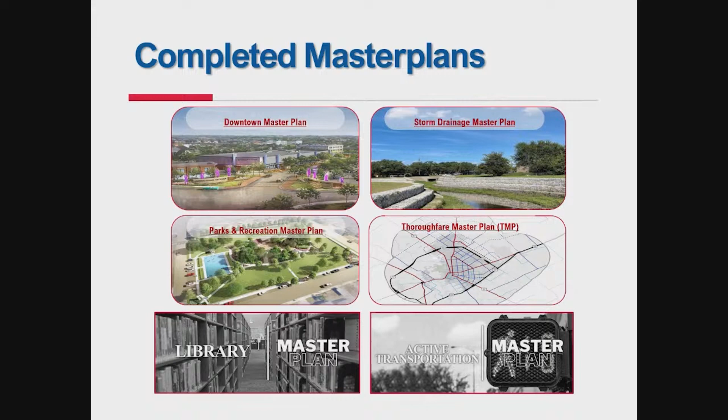So there are some things on there that have come from these completed master plans as they've taken a deeper look into specific issues or aspects of our community. With that, I'd like to go through what we are proposing to be in this next action agenda. These are not weighted as any one priority over another - they're all equally important, and they're all items that different departments, our stakeholders in our community, be working on, primarily city staff. They're broken up into those focus areas of the comp plan.

So the first out of land use and development would be to adopt our new and updated floodplain maps. The I&I drainage study implementation and drainage fee, and then infill and redevelopment analysis, really related to infrastructure projects and what infrastructure is needed to facilitate infill in certain areas of our town.

Under the mobility section, we have transit route study, increased downtown parking access and improvements, specifically being mindful of ADA accessibility, pedestrian and motorist safety, and more of a public information campaign with our police department and public information departments.

Then Guy Grant reconstruction, North Street reconstruction, and how do you phase those out, and the projects in their totality, because of course they're many years long type projects. And then complete streetscape package and mobility package - these are a specific action item out of the downtown master plan. I can get you more information on what those are in that plan, but it's related to that master plan.

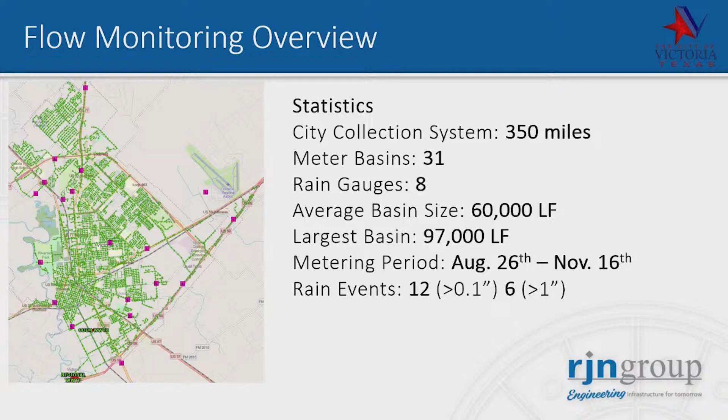That's a really good number, that's really where you want it to be. Anything larger than that doesn't give you a lot of information on the sewer shed, but anything smaller can just get really expensive. So this is like a really good spot to be.

The first step to doing the hydraulic modeling is building that model, and this is a very time-intensive process. We had the city provide us a lot of GIS and as-built records. We went out and did about 500 manhole surveys so we could get elevational data, and we feed that all into the model. We build a full system model, meaning every manhole, pipe, lift station, and force main is represented in the system. So it's a lot of data to feed into one digital network.

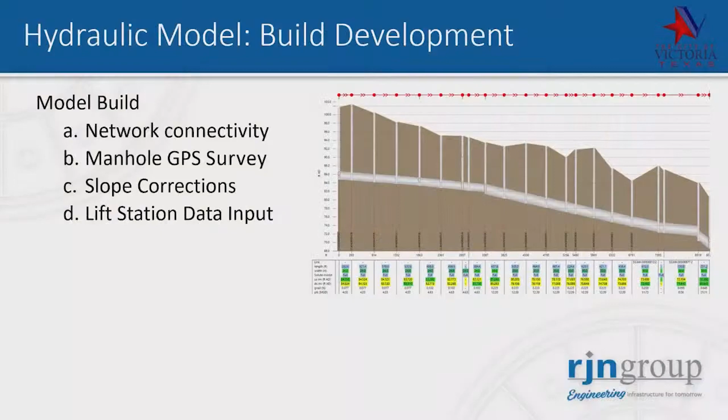That picture you see is essentially a profile — if you were able to look under the ground, that's how that pipe network would look under the surface. What we want to make sure is that everything is flowing downstream towards the wastewater treatment plants, and that the lift stations are represented accurately with pump curves and with the correct wet well diameters and force main diameters.

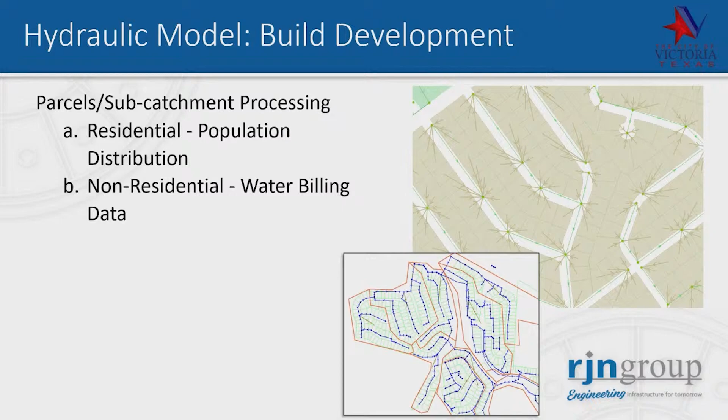Once the network is built, the way we load flows into it is by loading subcatchments into the network. Subcatchments are essentially what feeds those flows into the hydraulic model. The way we do this is we grab your city parcels and load those into the model as subcatchments, and if they're residential, they're loaded with a population, which is then multiplied by a per capita flow rate, and that's how you get some dry weather flow in there.

For the non-residential ones, we use your water billing data, about 90% of it, and we put that as a static number on the model to represent non-residential flows — anything commercial, industrial, restaurants, stuff like that.

So that each time on, does this have a pointer?

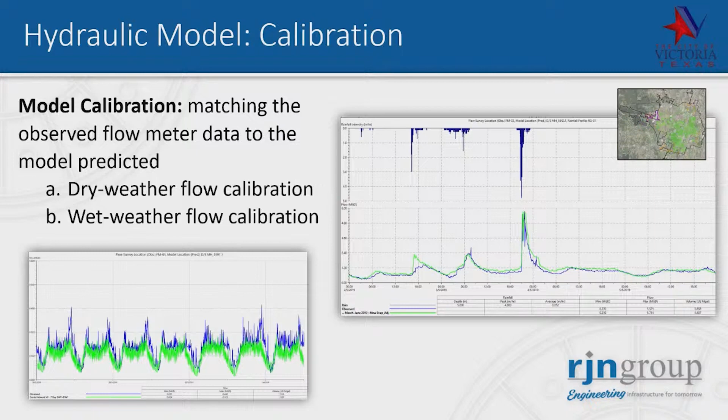Ooh, kind of. So these blue lines up here represent rainfall, and every time that it rains, your sewer system and every sewer system across the world, since they're not sealed tight, they experience some inflow from that rainfall. And so you can see the flow spike every time it rains. So we're trying to simulate that with the Wallingford hydrology method.

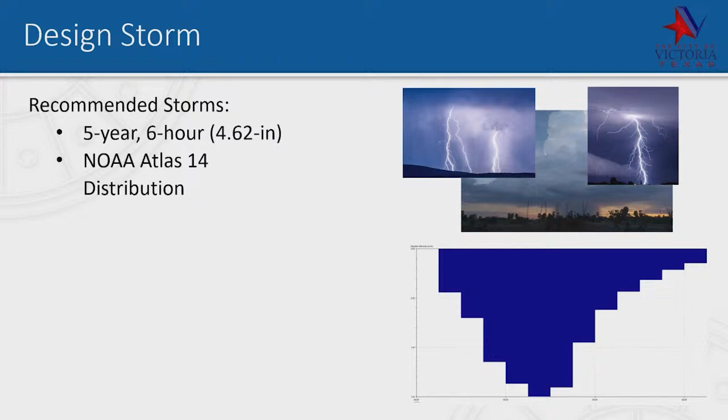So we finish a calibration for dry and wet weather flow, and then we want to stress your system to figure out where your bottlenecks are. So in the region, we normally use a 5-year, 6-hour design storm, which is what we have applied to the hydraulic model, to then stress the system and then see where the bottlenecks are.

Of medium importance is something that starts a surcharge. So surcharging is when the water level surpasses the crown of the pipe. So medium importance is something that's surcharging, so it's being somewhat restricted, but it's not reaching close to the surface of the ground, meaning that it's not close to being an overflow.

Then high importance is somewhere where it's surcharging and it's within 4 feet of the ground. So it's really close to overflowing through some manhole or to someone's house, stuff like that. And obviously the ones that we tackle first are any predicted overflows that the model gives us. So when that water surface reaches the top, that would be a sanitary sewer overflow.

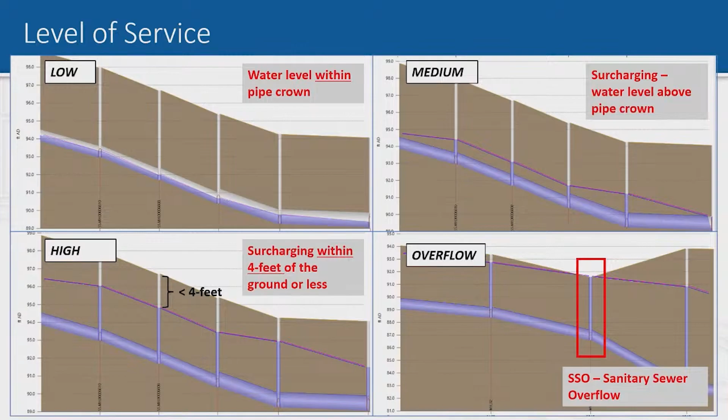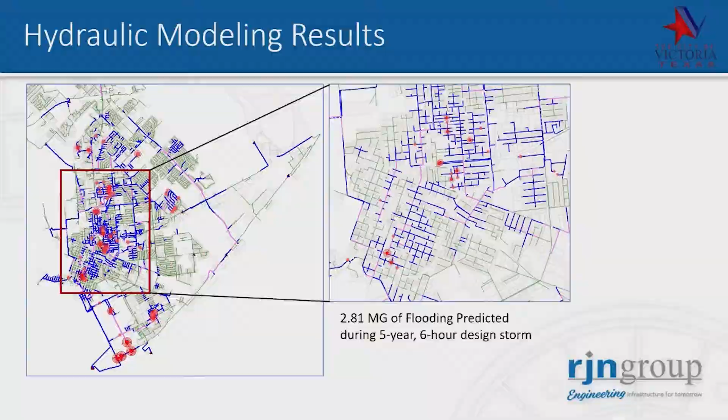So on the right picture, it's a zoom in into that area, and you can see that there's a lot of SSOs, but overall, I know the picture looks overwhelming with how many red dots you see, but in total, it's 2.8 million gallons of overflow during this very intense design storm. I've worked all across the state. For a city your size, you're doing pretty well. And so from this, we find out the bottlenecks and we start developing the capital improvement plans that we need to tackle.

So we applied a standard. The city's priority is to renew your existing assets to be able to fix the existing defects and therefore reduce the amount of I&I that's coming into the system. Based on the flow monitoring data and the model, we figured out the 6 basins that were kind of the leakiest, so where water is coming in the most, and we assumed that we're going to be able to achieve a 25% I&I reduction rate. So we're automatically reducing the flows from the model.

So we identified the 6 basins to target a 25% I&I reduction, and those are priority number 1. And then priority number 2, 3, and 4, which Jose is going to go through, are identified as a 20% I&I reduction. So that's applied to the model. And then based on the final results from that, we developed capital improvement projects for any SSOs that weren't fixed just with this I&I removal.

Can you speak into the mic? Sorry to jump in there.

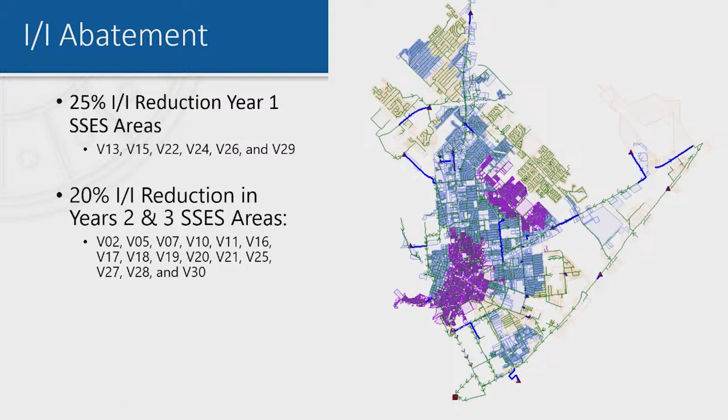Just if you go back a slide, one key thing we wanted to point out: she mentioned the system's doing really well. And when she mentions the 2.8 million gallons of overflows that we're experiencing, that's with the assumption that we do this I&I reduction. So I just want to hit that hard, that it assumes that needs to be done. If you ran it without those projects happening, that number would be considerably higher. So I just wanted to point that out. Thanks, Jose, for clarifying.

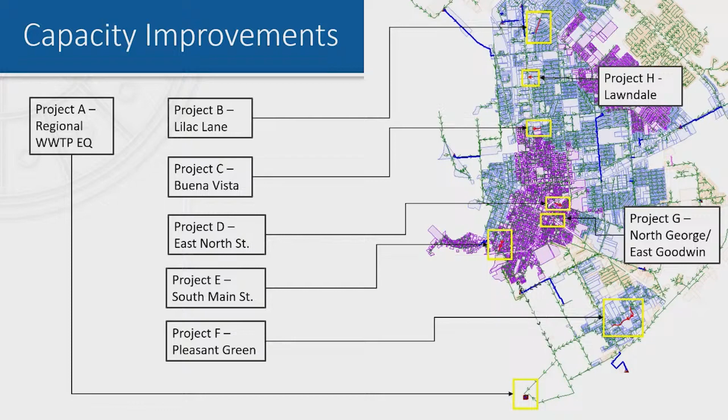So this is a list of capital improvement projects within the wastewater collection system that we've identified. And we'll jump through these. This is essentially the location; if we have to come back to see where they are, we can come back to the slide. So project A is at the very downstream. It's at the wastewater treatment plant. Right now there is a holding basin that's 11.3

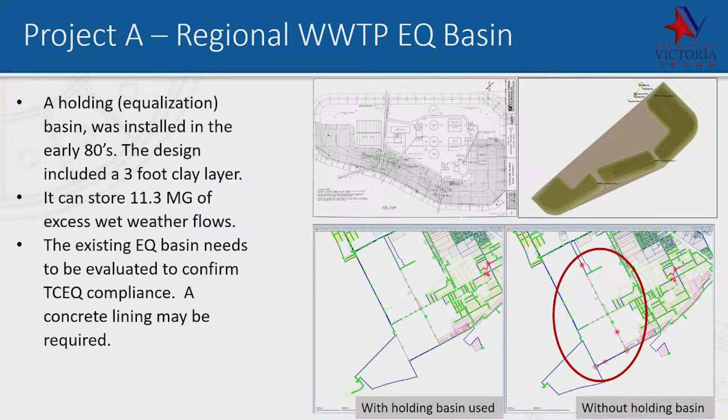And so the first project is to do additional studies at the EQ basin, because right now it's not permitted. But the idea is to do some additional testing in the EQ basin and figure out if there's an impervious surface still in there. So worst case scenario, if that impervious surface doesn't exist, we'd have to put some concrete lining so that we can use it and get the EQ basin permitted.

But the good news is that the basin is the right size. When it was built back in the 80s, it was very well thought out, so that basin fills in and out by gravity, meaning it doesn't have to be pumped in or out. So it's just a matter of doing some further studies and then getting it permitted, hopefully. But the 11.3 million gallons is certainly big enough to contain the flows from the 5-year, 6-hour storm.

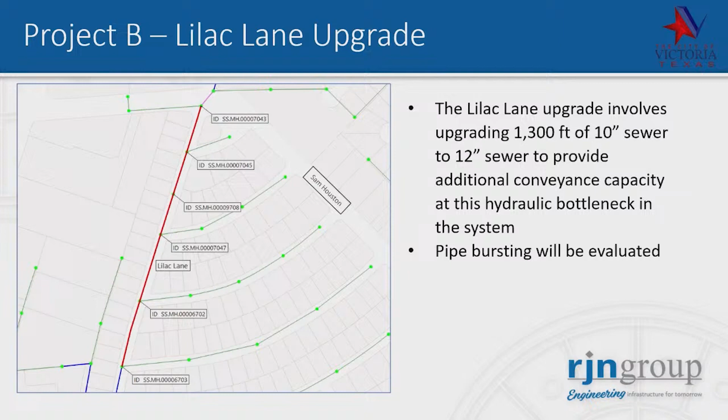Project B, the next set of projects are all upsizing pipes, so I'll fly through them, but if you want to stop me, feel free. So Project B is on Lilac Lane. It's just upsizing a 10-inch to a 12-inch sewer, and since that upsizing isn't that great, we're going to also evaluate if we could just do pipe bursting. That way we don't have to renew the assets completely. Project C is on Buena Vista Avenue. It's about 850 feet of upsizing sewer from an 8-inch to a 12-inch pipe.

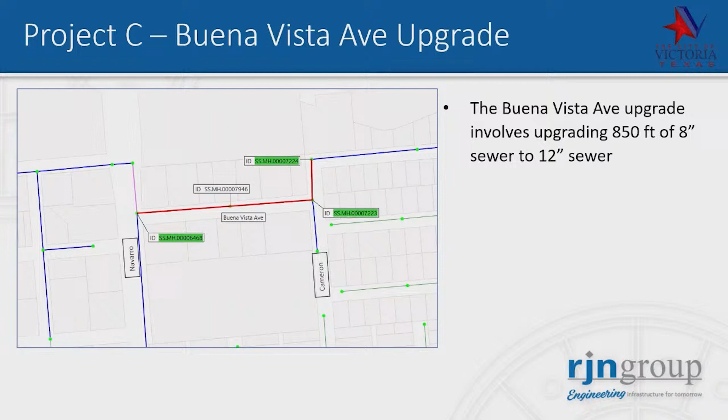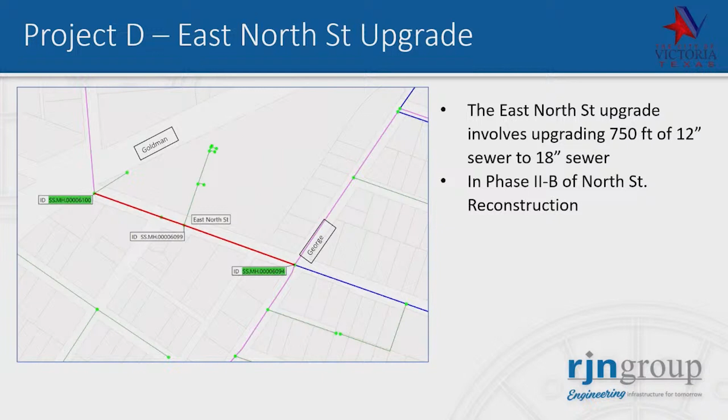On East North Street, there is an existing 12-inch that's pretty restricted, and it's a matter of upsizing this from a 12 to an 18. There is currently another project going on there, Phase 2B of North Street reconstruction. So the plan is to integrate the sewer upsizing as part of that existing project.

Project E is along South Main Street. It's a pretty large bottleneck; this is in the very center of the city, one of the older parts of town. And there's a lot of flow coming through this 12-inch, so it's pretty restricted. So the idea is to upsize the 12 to an 18-inch and reduce a lot of the surcharging that's occurring upstream. This one would target a lot of those SSOs that you saw in the very center of town.

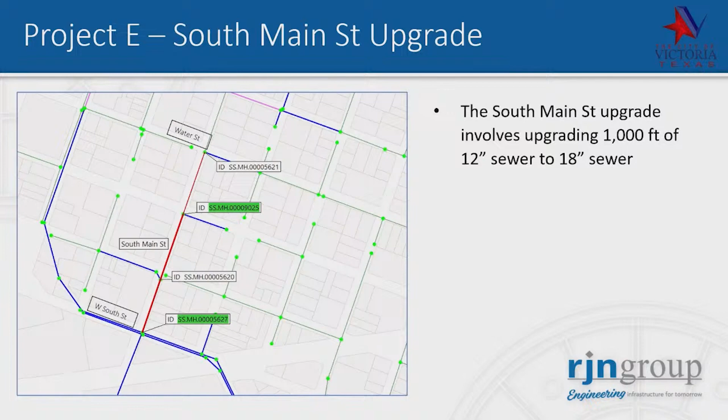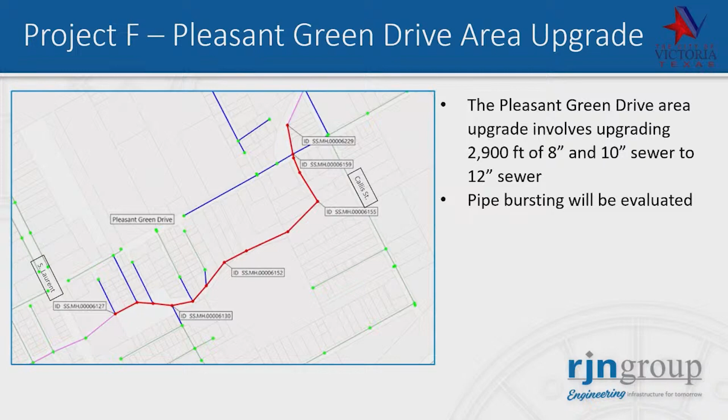Project F is on Pleasant Green Drive, and that's about 2,900 feet of upsizing an existing 8 and 10-inch sewer to a 12-inch sewer. I think most of it is an 8, so it's mostly upsizing that to a 12. Again, pipe bursting will be evaluated here, so if we can do pipe bursting, we will. That'll save some money. That way the assets don't have to be completely renewed.

Project G, this one requires a little bit of verification. We did some manhole surveys in this area, and the manhole surveys said that this pipe was a 15-inch, which causes a big bottleneck in that area because the rest of the sewers are 21. But we think that we just need to do additional verification to see if it's actually 15. If it is, it has to be upsized to a 21, but if we go out there and find out that it's actually a 21, it was just recorded incorrectly on the survey, then this project would then go away.

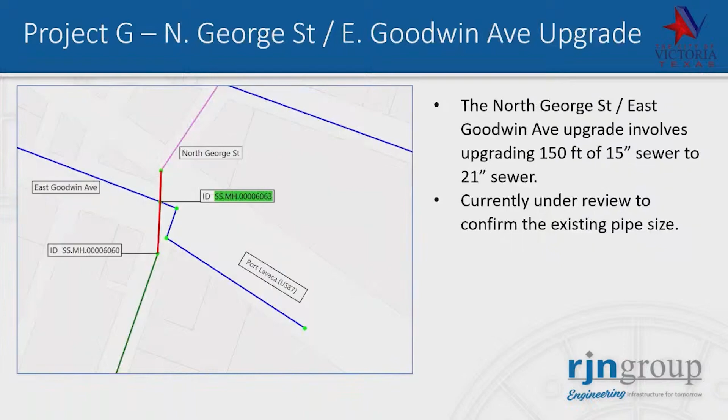Project H. So can you go back to that one? Yeah. So assuming that it shows that that's actually a 21, like the rest of it, then is there another issue? No. Or is this being recommended solely based off of the flow monitor or the model? The model. The model counts it for being 15? Yeah, the model has it as being 15 because the survey data that we did in the field said that it was a 15.

Got it. But the GIS says that it's a 21. So right now, there's two differing sources of information, and we found that out a couple days ago. So it's just a matter of going out there probably next week and seeing if it's actually a 15 or a 21. If it is a 15, it has to be upsized to a 21. But if it's a 21, then this project would be scratched from the list completely. Got it.

Did that? Yeah, thank you.

All right. Project H on Lawndale Avenue. This is actually extending a sewer pipe, so we don't normally like to do this, but sometimes it's very efficient to try to divert the flows to an existing pipe that has capacity. So right now, the Lawndale Avenue pipe flows to the right, and the one on North Navarro Street goes south. The one on Lawndale Avenue surcharges, and there's a predicted overflow right there because the sewer downstream of that is backing up.

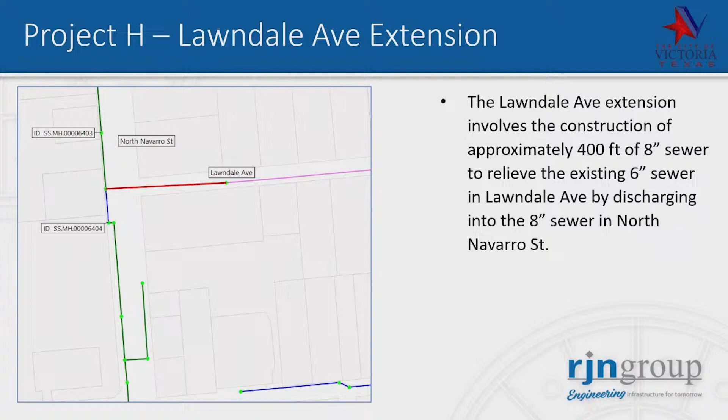But if you just add a little 8-inch connection between Lawndale Avenue and Navarro Street, you alleviate that surcharging, get the flows to another place, and then eliminate that SSO. So our recommendation is to essentially create an overflow pipe.

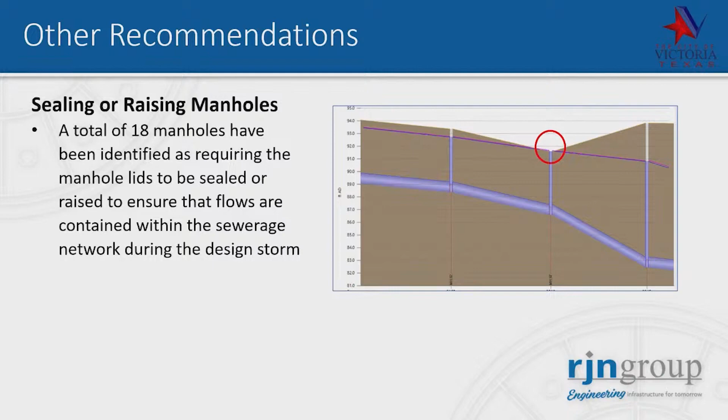I have a question. Go ahead. Are these listed in order of importance? Yeah. So not necessarily, we were just laying out an order. That's what we have, A, B, and C. Engineers, we like to either number or use letters, and then we can work it out. We have a ranking that you see later on, so some of this has some play on what can be done. One doesn't affect the other in a way.

And can I ask a question too? I'm going all the way back to Project A here, sorry, on the EQ basin. I understood the presentation, but my question is, is that currently being used as part of the system? So it is in use now? Only under emergency situations. Go ahead.

Yeah, when the plant was originally built, they actually designed that into the system, and it works efficiently. When the rains come up and we get a lot of inflow, the sewer doesn't have to be pumped into that basin, it flows into that basin, and then as the rain subsides, we treat that sewer and it's right back out. So it's a very efficiently done system. Great. It's just what she said, it's got a clay liner on it according to the plans. We just need to absolutely 100% verify with TCEQ that we're good with that liner. Okay, all right. Thank you for that clarification.

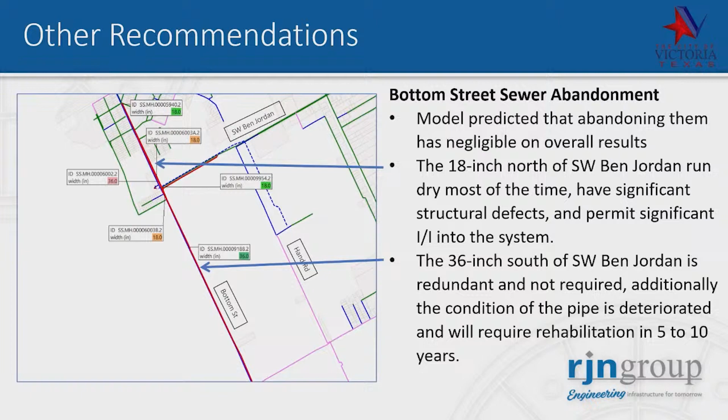So our plan, we ran the model without those pipes to see if there was sufficient capacity to convey the peak flows to the plant, and the 36-inch and 54-inch are appropriately sized. So the plan moving forward is to abandon those older assets to be able to remove I&I from the system, simplify the system for the city to have less assets to maintain while still providing the service that they need to convey the flows to the plant.

And that's, go ahead. A few comments to expound on what Daniela did. She did great. One thing, she mentioned the overflows. Remember, that's putting a 5-year storm on the whole city, right? Yes. That doesn't mean these are overflowing now. That's an extreme event. If you take 5 years and throw it all over the city, that's a lot of water. So I just want to kind of settle that down. We're not seeing these every time.

The other thing the model does is part of when we look at economic growth, we have to look, does our sewer system handle a potential subdivision or a potential industry? As she said, you can go in there and put a load on our sewer system at Ball Airport, for instance, and see, does that downstream sewer start surcharging? Do we start having issues? So this model not only shows what we see now, it can see what happens in the future as we add economic development, add buildings.

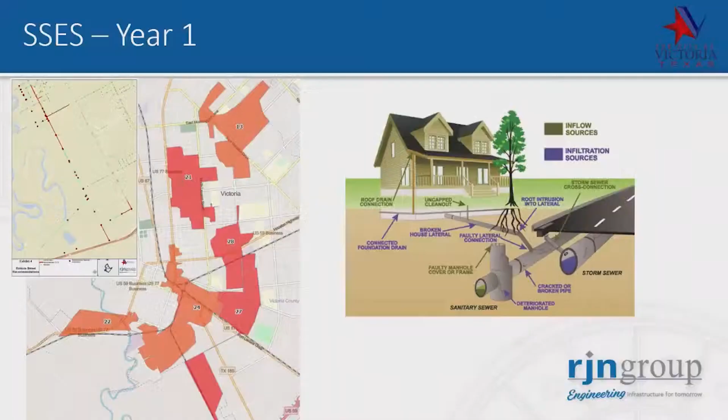So in the smoke testing, these are the things we want to look for: the defects on the main lines. You find some on the manholes too, because what smoke testing does is push smoke into the main and see wherever it comes out. Everything is the path of least resistance, so if it can find a crack and a fissure to get out the ground, that's a pretty bad defect. There could be light smoke or heavy smoke, but it tells us where the issues are. On the cleanout, it's very easy. You see the smoke coming out there.

It's a little trickier when it comes out of the mains because it's seeping out through the ground. The smoke may go through the cracks. It gives us an idea, but there is definitely something. This smoke does not just seep through the pipe. If there's not a crack in the piping, generally it's not going to make it through. Very similar to manholes. Again, cleanouts and those type of things come out very easy.

A big one, and we found several of these, is when we see smoke come out of your storm drains. That's where your storm water goes, so when those pipes get full, it has a direct line to your sanitary sewer system. We don't want to see it, but these can be simple fixes, and this is how much water they can keep out. What we try to do is give you an idea of how much flow could be going in. These are estimates.

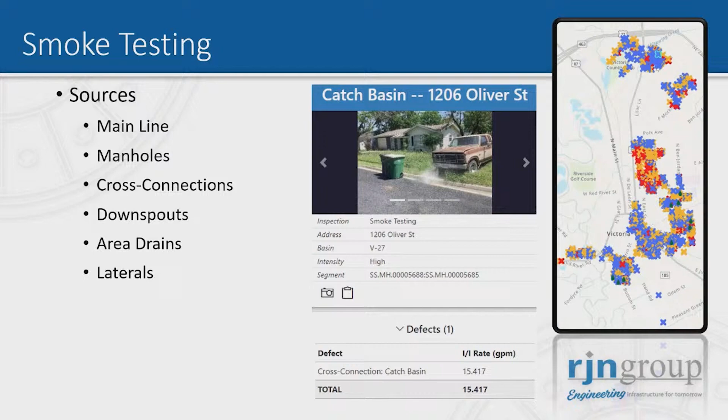Any questions on the smoke before I move on to the manholes?

Okay, manholes. So these are going to be more visual inspections. We actually go to each specific manhole, open them up, look inside. We have cameras and flashes to see whether there's cracks, corroded tops, broken lids in some cases, some of which we reported to the city to make sure those are also public safety issues that get replaced as soon as possible, because obviously that's something we have to think about.

But there are many different ways that inflow or infiltration can get in. A manhole is just a vertical pipe, and it gets more exposure.

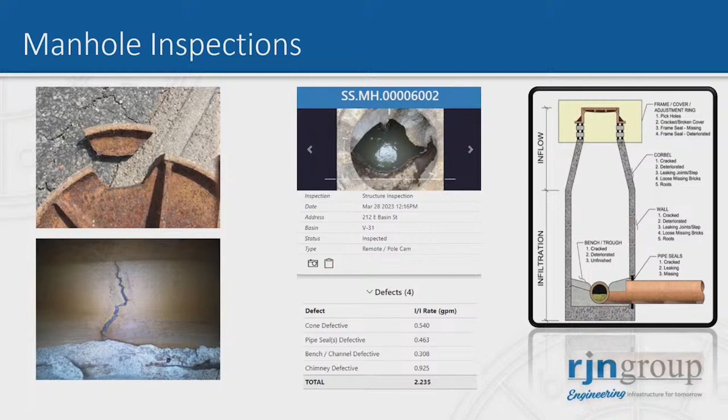So these are really where we see a lot more of the issues, the manholes, where I&I comes in. Like I said, the manhole tops are a big one. The sealing in between, what you see here, they call pipe seals, these corrode over time. If these go away, water can just easily go through here. You never even notice it, but slowly over time water just accumulates, and it's happening all the time because it could be just groundwater. You don't need a rain event to cause those.

So again, we're trying to tighten up the system as best as possible.

So a lot of data here as far as what we found, different categories. Like I mentioned, a big portion of it is here. We were talking about the private side, the laterals and the cleanouts. It's a large number that you see here. You'll see that the main lines are going to be the smallest, and the majority of these are related to the manholes.

What we estimate here as far as possible I&I that could be identified is about 3.7 million gallons. Again, that's more when we're looking at the extreme events, when you're having a 20 or 22 million gallon total flow for the system. You could be looking at a number like this. If you address everything, you may be able to reduce that number.

Again, just want to emphasize, just because that's what's there, when we do a repair we may not get it to 100%, but if you can reduce 80 to 90% of that number, it makes a huge significance to your system. And like I'll talk about in a bit, this does include priority.

We handle this slightly different than capacity. Capacity, these are all the projects that need to be done at a certain level. We had priority 1 and priority 2. I'll just explain that real quickly. When I say priority 1, these are the defects that can be repaired with less money to make a big effect. Our low-hanging fruit, the simpler ones that we can take care of without spending a lot of money and get a big result.

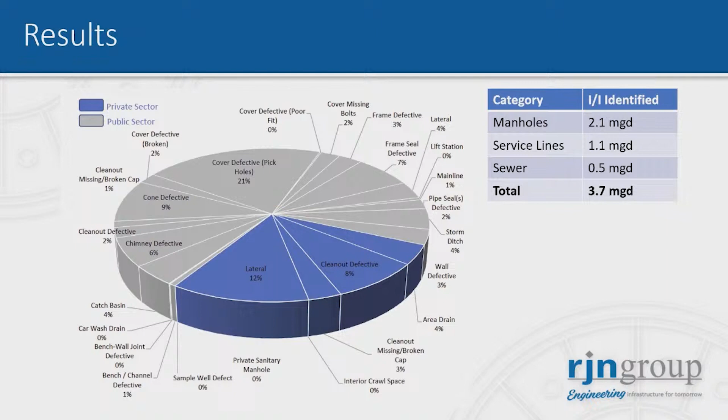So this includes both priority 1 and priority 2. It'll make more sense in a second.

And what we try to do here, this is where the model, together with our field side, helped us come up with a game plan on how to better fix it, to not have unnecessary pipes, like Daniela mentioned, that are in bad shape, that we don't want to spend money on fixing because they're not needed.

They're just redundant and they're not providing any service. And every single pipe will corrode over time on wastewater. I want to provide you a few examples.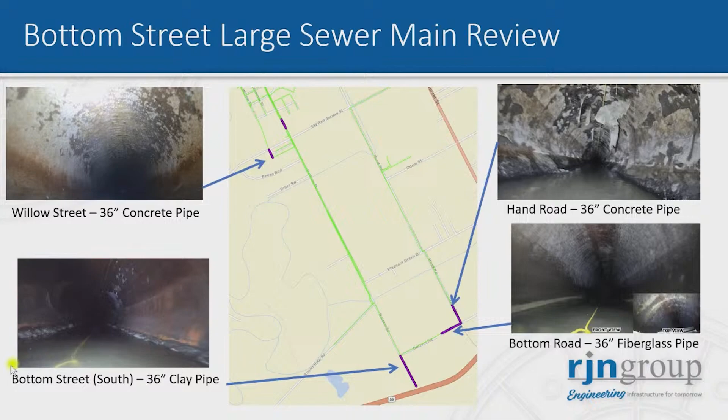So some of the newer pipes are in good shape depending on what was done. But concrete, even clay, I'd say on large diameter mains clay can actually be a fairly decent product if it's installed right. What we saw here is not a huge concern. Now, over 10 years, should you look at this? Probably, just to see what condition it's in. Would I see any rehab needed here? Maybe, maybe not, probably not, but it needs to be evaluated.

So again, I just want to paint a picture that right now we're focusing on the worst things that are out there. There are still other concrete small diameter pipes and clay pipes not being addressed in this project. Of the 56 miles, the mains I'm going to tackle here are closer to 3 to 4 miles. Once you start tackling one, should you do the next one because it's the same material?

Yes, you should, because these pipes have outlived their life. They're on borrowed time already, but you need to focus in on what will give you the best result as far as reducing the I&I. But structurally, those could be other concerns for the future. So, any questions? I know I kind of talked about a lot here, but yes.

Make sure, I know you're going to talk about it soon, but you're saying those projects are not within your window to talk about. They're not in my 5-year CIP, correct?

One thing I want to bring up, this area has been a concern of engineering's for years. Part of the reason is, if you'll remember, back in the day there was an old wastewater trickling filter plant on Willow Street that we abandoned when we built Odom. The sewer is going all crazy in this area. It went to the plant, then we took it away from the plant, then we had it.

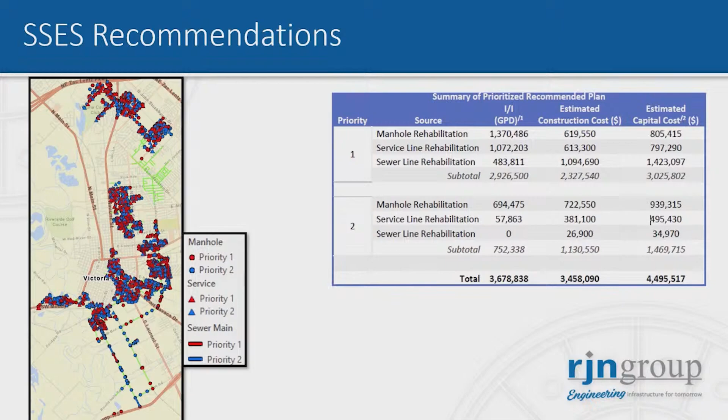At the same time, if these sewer mains are bad, the reason we bumped them to priority 1 is some of these are structural concerns. So possibility of collapses, those become real safety issues. On manholes, there's less of a concern. It's more isolated. And also on service laterals, you can look at those on a case by case basis, but sewer mains we typically bump to priority 1 just because of the safety concerns that could be involved.

But on those, we typically televise the lines, see how they look, and confirm they're in bad shape. Maybe 80% of it is bad shape - well, you can't replace 80% of the pipe, you're going to do all of it. In some cases, if it was just a PVC pipe that had a break somewhere, we're just doing a point repair and fixing it. But some of these are the full length of the pipe, so that's when you see the number is quite a bit for the amount of I&I reduction - it's not quite the same as the other ones.

So any questions before I jump into the list of projects?

Okay, so we took all the projects that we discussed, the ones from the capacity side on the modeling and the SSES, and also some of the remaining study that needs to be done, like the year 2 study and the year 3 study, because we still have other areas that need to be evaluated. The top 3 we list here are really hitting the I&I reduction projects, which are the SSES, the manholes, the service lines, and the main lines.

I'll throw in there that service line repair, in some cases, those are items that don't all have to go to contract - these are repairs. If the city has availability, those are funds that could be handled. I'm not going to speak to Public Works and Engineering on how that is handled, but there's an opportunity. It could just be a broken cleanout cap, replacing it. Simple things that can be done, not a lot of excavation - those type of things. That number assumes the contractor is going to do it, so those numbers can go down.

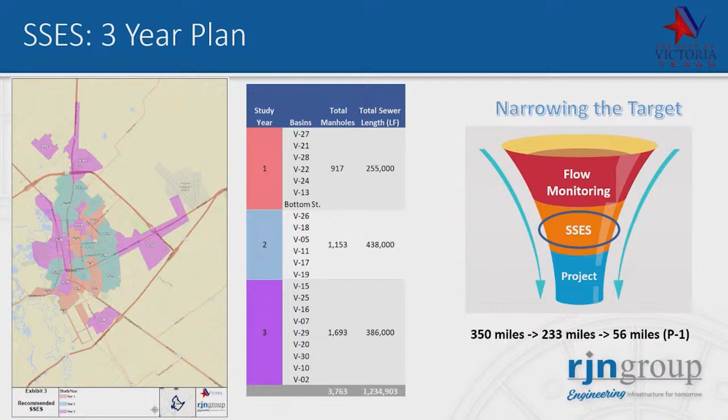Just because I included these here, this was grouping that I had. If you want to phase these over 4 years, this number could be less, under $1 million and so on. But those are decisions that we'd love to hear from you on. Well, let me ask this: is there any reason that the year 2 study couldn't be bumped to year 3 and that money then used for fixing some of the items that we've already identified in the initial study? The short answer is yes.

And one thing I want to make a point of. By the way, we're not trying to figure all that out right now, right? So some of this back and forth might be feeding the confusion that some council members might be feeling right now, because our objective here isn't to figure out the specifics of whether we do it in year 2 or year 3 or year 4. The objective of today was to update you on the latest of where they are with the study, so that it can provide some improved level of understanding, so that as we get into talking about the expanded CIP planning window, you get a better sense of what might be some of the needs that are coming that we might have to worry about plugging in, right?

Yeah. So we're not trying to solve all this right now, and I don't think it's worthwhile going back and forth trying to figure out what year we're going to do this or that. I think we've achieved the objective of today, which was conveying that the approach is clearly a parallel approach, like what Daniela suggested. There's a data-driven, model approach to addressing issues like upgrading the sizes of the pipes. And then there's the other approach based on data from the smoke tests, cameras, inspections, et cetera. And they have identified projects from both approaches that are low-hanging fruit, which are obviously the projects we would prioritize. Then we can worry about how much more we want to add to our plate with additional studies. But I think we've achieved the objective of today. So thank you for that.

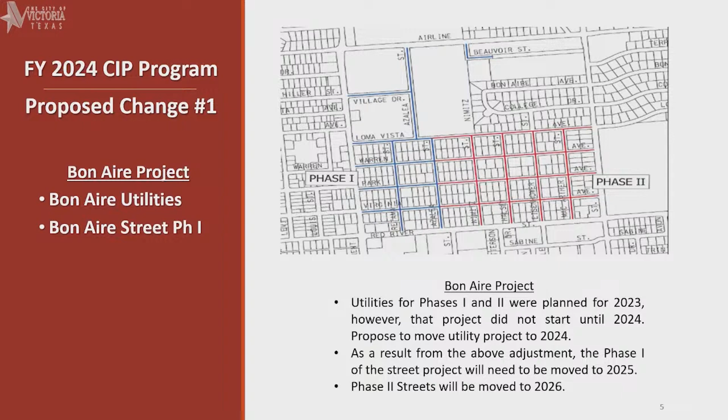Our first proposed change is on the Bon Aire subdivision project. The utilities for phases 1 and 2 were originally slated for fiscal year 23. They didn't get started until fiscal year 24, so we moved those into 24. And as a result, the street improvements as part of that project will be moved, phase 1 to fiscal year 25, with phase 2 of the streets to fiscal year 26.

Proposed change number 2, the Lone Tree Acres Drainage Project and the Water SCADA project. Both of these were submitted as part of the city's CDBG-MIT grant application that was submitted last November. And some of my old contacts are telling me right now that there could be 15, 18 months before these things are initiated as far as a contract from the state, and they say get started on it. So we've got a while. They're going to be pushed back into 25.

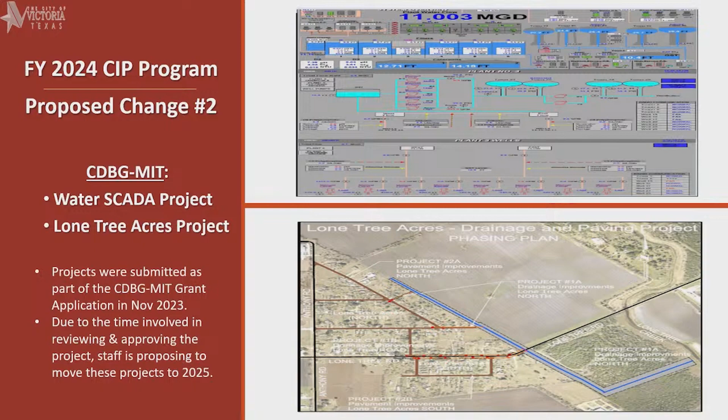Wagner Way was originally planned for 2023. It was not ready to be implemented that year. Final engineering wasn't completed, and there are right-of-way needs to be acquired. So initially that project was pushed back to this year, 2024. However, the right-of-way issues have not been resolved.

The design has been completed on that section, but we're also going to include, even though they're three separate streets, they are one contiguous routing from Country Club to Main Street. The proposed schedule on this now will be that we will try and obtain the right-of-way for Wagner Way in fiscal year 25, and perform the engineering design on Magruder and Lingo Lane also in fiscal year 25.

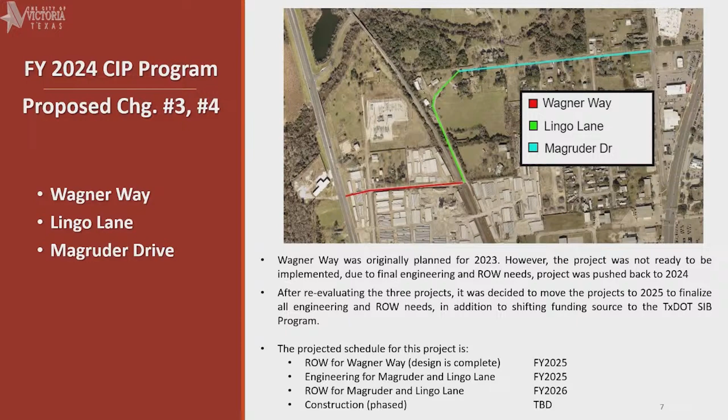That engineering design will identify any right-of-way needs, and those would be acquired in 26, with construction to be phased. At this point in time, no schedules, just to be determined. We anticipate it being phased. We do not know exactly how we would break it out, if it'd be two phases or three phases; we're still discussing that.

And I'll just briefly add, it goes without saying that there are some complexities with getting this project to the finish line. As David implied, it was supposed to be done last year, and so we moved it to 24, and I get that what we're proposing might be a little further out than what we all envisioned, but until we can resolve some of the lingering issues, it just doesn't make sense for us to use up or reserve dollars for this project when there are things left to be figured out.

Once we figure out some of the right-of-way issues and get further along in the design, we can always revisit the timeline conversation if council prefers. Obviously, we'd have to have a conversation about funding, but it's difficult to feel confident in a timeline while there are still items lingering. So for the benefit of other projects we feel we can get done in the short term, we felt it was appropriate to push this out until it's shovel ready. I hope that makes sense.

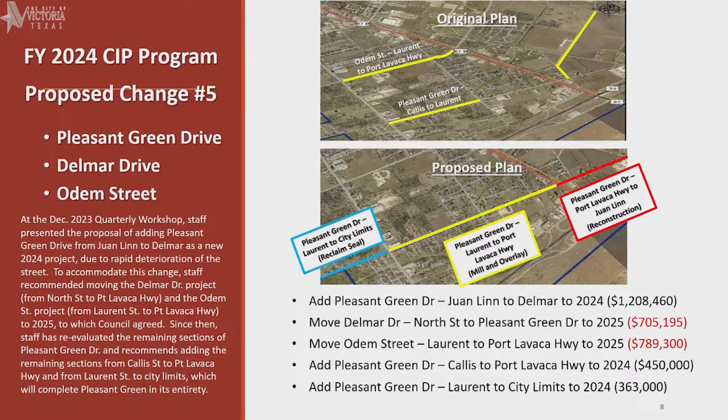And then in order to complete all the work on Pleasant Green, we would reclaim and seal from Laurent Street to city limits. Then Callis Street will have new street surface from Juan Linn to city limits. He means Pleasant Green. Did I say Callis Street? Yes, I did, didn't I?

And I will say too that this, I guess, southeastern part of the city core, there's a big chunk of it that's outside the city limits. And so there's a big chunk of Odem Street and a shorter chunk of Pleasant Green that is not under our purview or responsibility.

And so that's just something to be mindful of, because even after we do this fix, there might still be some people that come to us as the city to say, hey, why didn't you go all the way to Odem Street? Or why did you leave that gap? And the reality is that our jurisdictional line doesn't account for that entire area. So just something to be aware of.

Do we coordinate that with the county at all? Do we let them know that we're getting ready to do this? I haven't. I personally have talked to Commissioner Garcia about it to give him a courtesy heads up, just in case he hears from constituents about it.

We've had some conversations around how can we help partner and collaborate on infrastructure projects that might be hovering around city limit lines, right? Because we do have a handful of roads like that. Think of North Street on the north side, this particular road on the south side, where it's almost right at the city limit line, where it might make sense to coordinate.

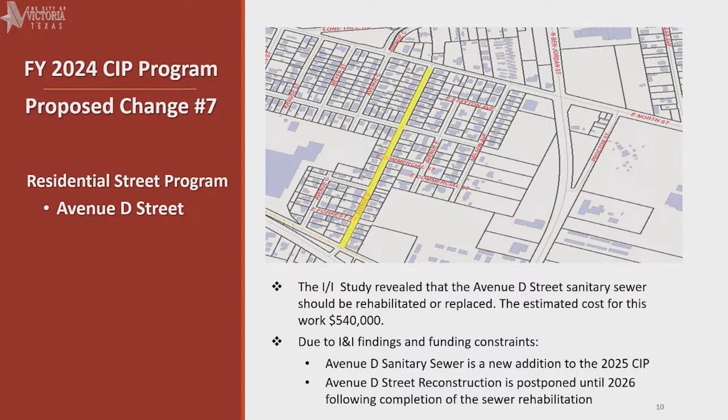Proposed change number 7 is in the residential street program for this year. We had initially proposed Avenue D to be reconstructed as part of the residential street project, but in one of our preliminary meetings with RJN, they had identified that there was going to be a sewer line on Avenue D that was going to need to be rehabbed or reconstructed. It did not make any sense to rebuild a street that within a year or two we would be tearing out to rebuild a sewer. So our plan right now is to try and redo that sewer in 2025 and do the street reconstruction then in 2026. Yes.

And by the way, each time we reference shifting or moving out a street project, we're very mindful of our goal of trying to address 112 miles of streets by the end of fiscal year 26. So even though we're recommending pushing some of these projects out, we're pushing them to either 25 or 26, because we want to stay true to our commitment to achieving these projects within that planning window, meeting our goal, et cetera. But as you're learning, there's some really good reasons why some of these make sense to push out. So I just want to make that clear. We're not removing them. We're not eliminating them. We're simply rescheduling them in the existing planning window.

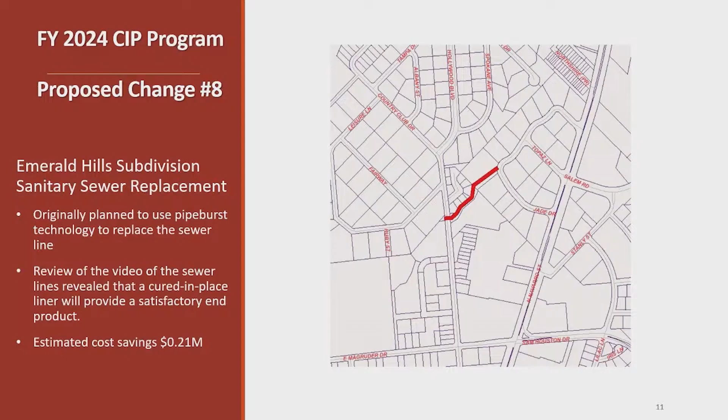Proposed change number 8. This was primarily just a budgetary change. We still plan on doing the same work. Initially, it was proposed to improve the lines using pipe bursting technology. But that sewer line runs along a creek bank, and services are in backyards. We've prepared an estimate to do the work utilizing the cured in place pipe, the CIPP liner, and that is actually less expensive than a pipe burst. There are other benefits to using that. It provides the same level of pipe integrity when it's done, but the service connections can be done internally with the CIPP.

That keeps from having to put a mini excavator in somebody's backyard to dig it up to reconnect the sewer. There's just so many headaches trying to go through fences, dig up the services, redo the yard, put the fences back up. If we can minimize some of these excavations and intrusions into people's yards, we'd like to do that. Not to mention the fact that we can save $210,000, or that's the estimated savings.

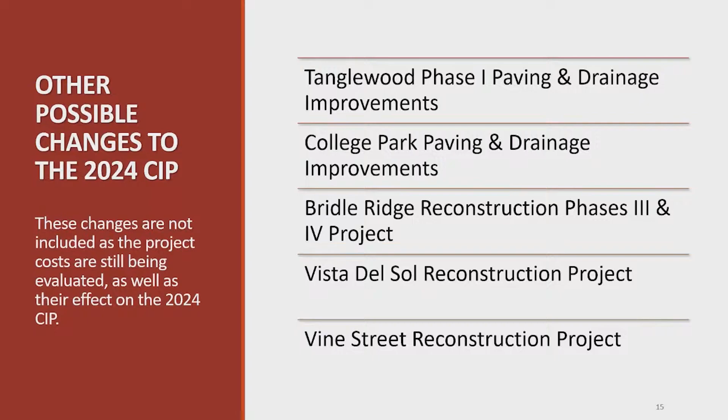Tanglewood Phase 1, streets and drainage. We had an initial budget of $5.25 million on this project. The consultant prepared an estimate for us, and his estimate was $8.9 million. There are various reasons for this 3.65 increase in estimated cost.

One of the biggest reasons is there's just been an overall increase in construction cost. We're seeing this almost daily increase. Also, the scope of the design drainage was greater than what was initially conceptualized when the budget was prepared.

Urban engineering is currently in their design has scope for replacement of some of the storm sewer pipes. The initial budget did not have for any replacement of storm sewer pipes, it was primarily to do cleaning of the storm sewer lines. So at this point in time, we're going to be investigating, exploring the cost with Urban as to what it would be to just replace inlets as needed, adjustment for grade purposes as we redo all the curb and gutter there, and also clean the storm sewer lines.

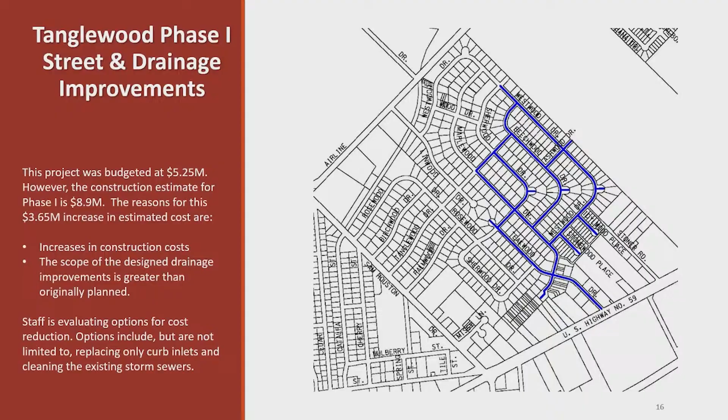You've got in this, where is it? There it is. This section here drains out Ashwood right into the detention pond on Lone Tree Creek. So that water just gets in the storm sewer, boom, it's gone. It's already to the outfall. That's always a major issue, is that if the water can't get to the outfall, then it stays in the storm sewer, it can't get out, and it builds up in the streets. Think of Ben Wilson, right? Yes, where it backs up because its path to the outfall is complicated. Versus in this instance, the outfall is right there.

Well, let me ask another question. If the street lasts 30, 35 years, is the drainage going to have to be replaced before the street has to be replaced in 30 or 35 years? Some history: Tanglewood was built, and a lot of the other neighborhoods, we look at that updated storm drainage master plan upgrade.

What that plan did was do a rain-on grid. They took a storm and dumped it over Victoria. One of the things we look at is each neighborhood, what color is it, is there houses that flood? Because that truly means we've got a drainage problem, but in a lot of other neighborhoods, yes, the street may have some flooding tendencies, but that's during a 10-year storm or even an extreme 5-year storm, meaning high intensity, short duration. What we look at, personally, is do houses flood? And we don't have any records of that. Looking at that rain-on grid, it didn't show anything.

Cleaning the pipes out, that's a big plus, I think. We haven't cleaned storm sewer in a long time. But is your answer to your question directly no? It's not going to affect the street life. The drainage is still going to be as good or better because we're going to have new inlets. My question was, would the drainage system last the length of a new street? Yes. Nothing else is getting developed in this neighborhood to produce more water than what's already being produced. Correct.

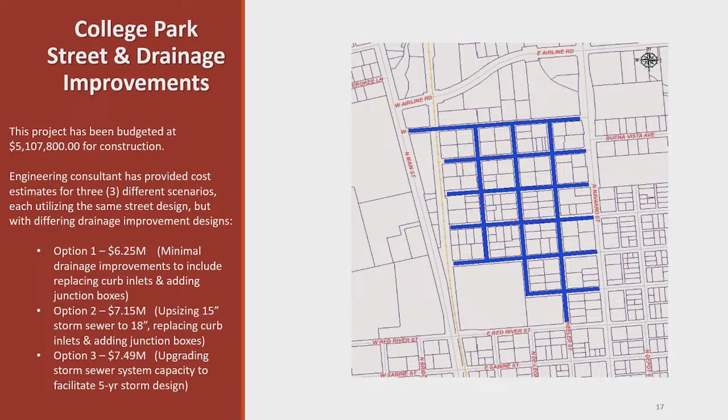Option 2, at $7.15 million, would be upsizing some of the 15-inch storm sewer. This typically occurs running from the curb inlet to the main. Current city standards are an 18-inch minimum, so we're looking to upgrade to at least that.

Option 3, at $7.5 million, would upgrade the overall storm drainage facilities within that subdivision to a 5-year storm standard, according to the drainage master plan.

From a cost standpoint, I would not recommend option 3. Also, all of these storm sewer drains tie into the drainage on Navarro Street. We can spend a lot of money upgrading the storm sewer pipe sizes, but we're still restricted when we get to Navarro Street by the drainage there, until TxDOT does a major project. Until then, you'd still have the same issues. However, at this point, from my understanding, there are no flooding issues in this subdivision either—none reported.

So, trying to get a feel for how much upgrade of drainage we want to do in a neighborhood where it may not be needed, or where it's restricted anyway because of a TxDOT Navarro project that may or may not happen, which is completely outside our control—I think a blanket answer is we don't want to spend money on drainage improvements that aren't needed. Okay, we'll leave it at that. We'll move on, because we have plenty of other needs on drainage, and we have to get to Allison.

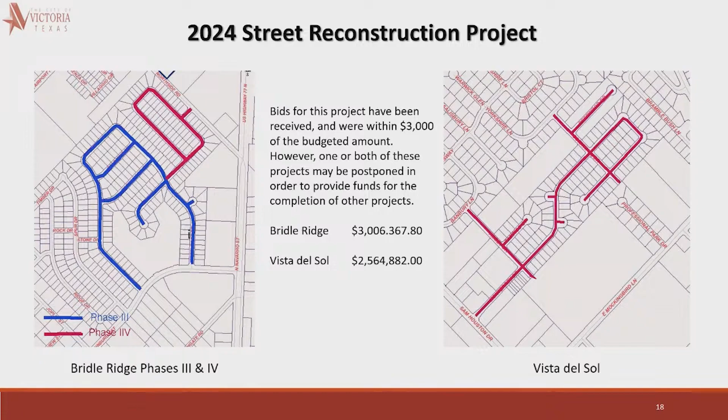Part of the 2024 street reconstruction project involved two streets in two different subdivisions that were bid on. Phases 3 and 4 in Bridle Ridge subdivision came in at $3 million and change. Vista del Sol subdivision came in a little over $2.5 million. Overall, this is only about $3,000 over what was budgeted.

However, we're still holding off on making any recommendation of award to council until we get more bids in. We have bids coming in on another street project next week, and we just received bids on the residential street project yesterday. We'd like to have all these numbers together to know if we can do all this work, or if we'll have to possibly postpone something.

I think council's position on the drainage improvements will help us fine-tune this next time we discuss it, which we plan to do at one of our regular council meetings in April. Because if council had said for sure do the whole enchilada in Tanglewood and in College Park, we'd suddenly be $5-6 million short, and in that scenario we'd probably have to move one of these projects. But with your direction that you're okay with us not spending on drainage unless we absolutely have to, we can go back and figure out if we still have to do this or not.

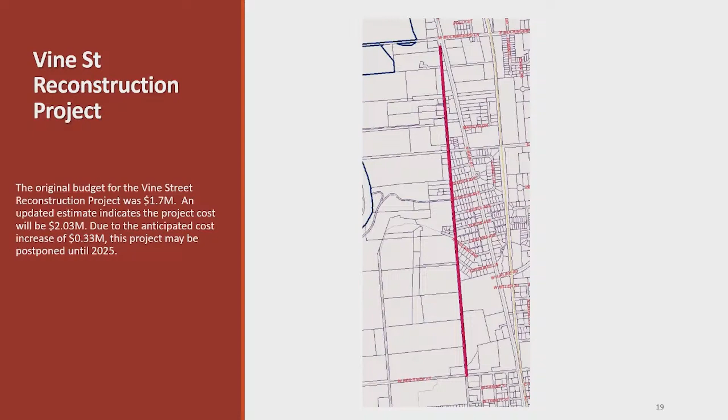So, Vine Street reconstruction project. I reevaluated the estimated cost for this project based upon some current bid prices we've received, and what we were seeing was an increase of about $330,000 for this work. As it is right now, that project is going to be pushed to fiscal year 2025. That'll be our recommendation, let me put it that way, because it's not me to make that decision.

That'll be you ultimately. Was moving this project also dependent on the others? That's the idea. Okay. So potentially moving this project could also be reconsidered if we don't have to spend all the extra money that we would have spent had we actually done the whole enchilada of the drainage improvements. So more to come on this one next time we chat about it. Good. Excellent, because if we don't have to move it, I'd prefer not to. Yeah.

Are you talking about the Vine Street project? Yeah, I don't want to move it either. Oh, I'm sorry, there's a question? I can't hear. No, just the comments were, if we don't have to move it, we'd rather not. We'd rather leave it in 24. We don't want to move it. If at all possible, we'd like to do that too, because if we move it back, it most likely will be more.

Right. Yeah, okay, understood. But I want to make sure it's clear, it's part of the whole mixture. How these other two come out, and if I can do it, I'll leave it at 24. If I can't, it has to move to 25. Or we gotta have conversations on other funding sources, budget amendments, all sorts of stuff. Right.

2024 residential street program. We received bids on this past Wednesday. Avenue D, I talked to you earlier about moving that street back till we were able to do the sewer line work. Since we already had quantities, we included that just as an alternate bid item, so we'd know what that work would cost. It was $950,000, I believe. But anyway, not including that, the bid came in at $3,662,000. This did include the Pleasant Green section between Laurent and city limits. That was over $1 million more than what we had budgeted for this work.

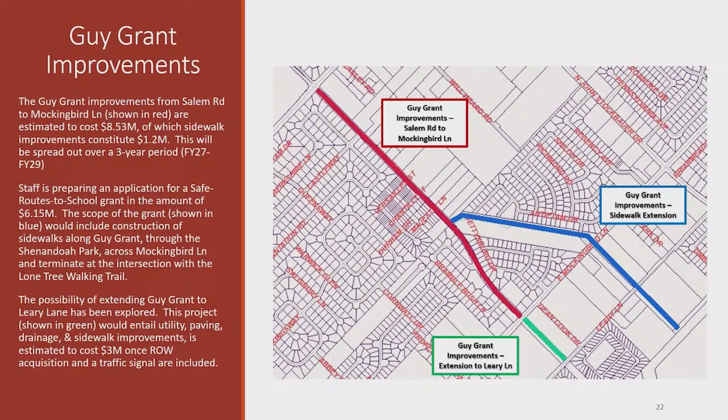Also, another option that was presented to us by Urban was the potential for an extension of Guy Grant from Mockingbird to Leary Lane. That would involve right-of-way acquisition, extension of a water line connecting between Leary and Mockingbird, extension of some sanitary sewer from each side, and sidewalk. And that alone is about a $3 million addition.

You may recall that the last time we discussed this, we agreed that we would focus on the existing part of Guy Grant because it was just going to be too expensive to run it all the way to Ben Jordan. Obviously, it's still in our thoroughfare master plan, so it can still happen in the future. But for purposes of what we may try to squeeze into the new planning window, we wanted to focus on just the existing part. Mark suggested possibly extending it to Leary Lane just to help with circulation. We thought that might be a worthwhile exploration. But ultimately, it's going to boil down to how we split the expenses up, and we're still working through that for this project. But this is how it's shaping up.

All right, we have to move on. North Street. Let me handle the next few slides. Go back. Go back.

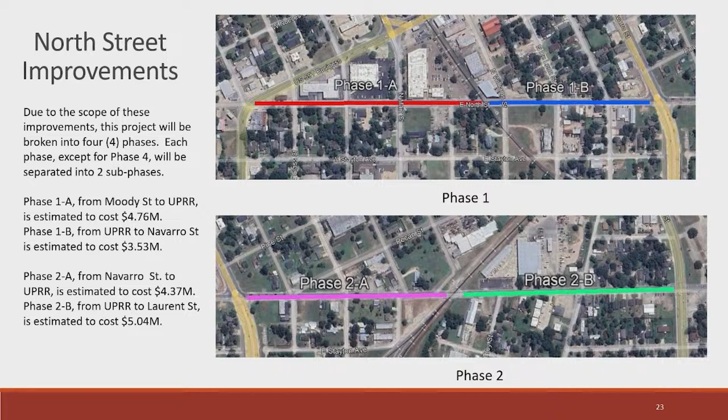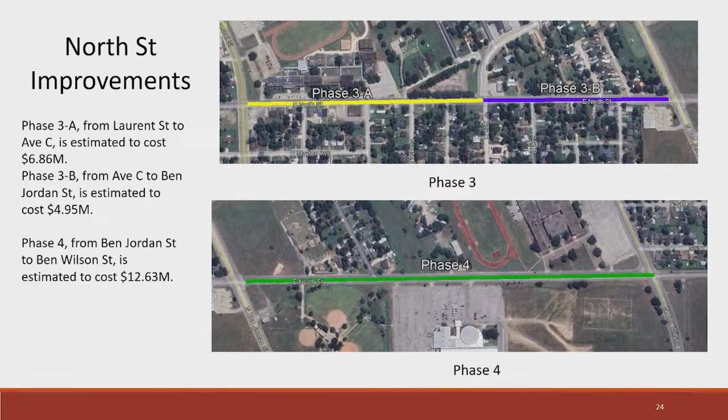So it's an expense that we're going to have to split over 2 phases, in essence. Even though it's only phase 3, we're going to have to split phase 3 into 2 phases. Next slide, please. This gives you a sense of what we're looking at. As we alluded to last time, we can start doing some of the engineering work during our existing planning window, which we're proposing happen during fiscal year 26. Then we begin the phased implementation of 3A, the part in front of the middle school, and then 3B, which would be the rest of it.

We do think that this is feasible and doable to split it up this way, but we have to be realistic that this whole project is ultimately going to take a long time when we have to look at splitting each phase into mini phases.

And I want to be very, very specific in this next comment that we have very intentionally put both the water and sanitary sewer improvements and the paving, drainage, and sidewalk in the same fiscal year for that first phase, because our thought process is if we're going to disrupt what's going on in front of the middle school, you might as well knock it all out in one go. Yep. However, the second mini phase of phase 3 does get split over 2 years, because at that point, it's not as directly impacting what's going on with the school. Does that make sense? It does.

And based on what I'm seeing, Guy Grant and North Street, or at least North Street phase 3A and B, are going on at the same time. There's some overlap. There will be some overlap. Oh, yes, 100%. On the timeframe window, right? 100%. Because we talked about splitting those out just because of the costs involved, but I'm assuming that because we broke down North Street into phases, we can handle both over a period of a couple of years. Right. Fair assumption? Yeah, 100%. Yeah, but there's also more things to get done other than just North Street and Guy Grant, even in the lens of thoroughfare streets.